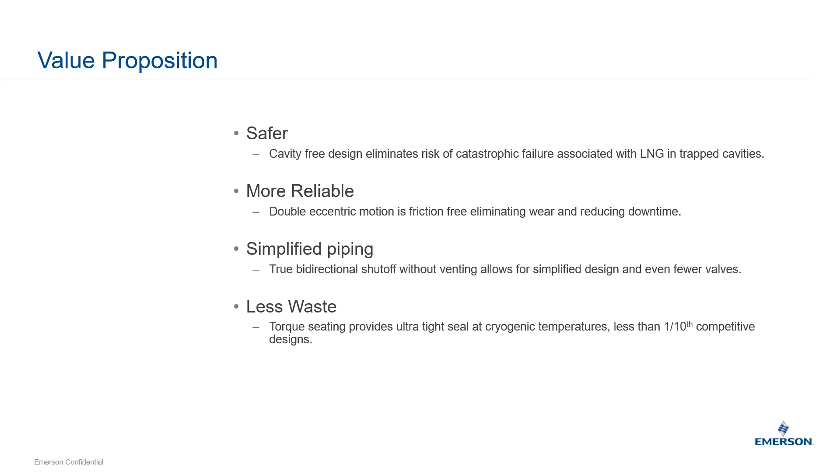We have a valve that seals tighter than anything else on the market. We also took into account today's emissions issues and standards, and tried to make the most efficient valve possible.

So a little bit about AEV. We're based out of Belgium. At the moment, all of our valves are manufactured in Belgium. We have a state-of-the-art manufacturing facility there that we built about 6-7 years ago. When we originally built that, just as we completed it, we were growing so fast we doubled it in size. And now we're doubling it again in size.

We purchased the property right next to us, and we're building a whole other building, kind of a mirror image of what we currently have, and it should actually be completed this summer. So it's kind of nice - we have a modern, clean, super efficient manufacturing facility. Not only do we consider ourselves technical leaders in design, but also in manufacturing and project execution.

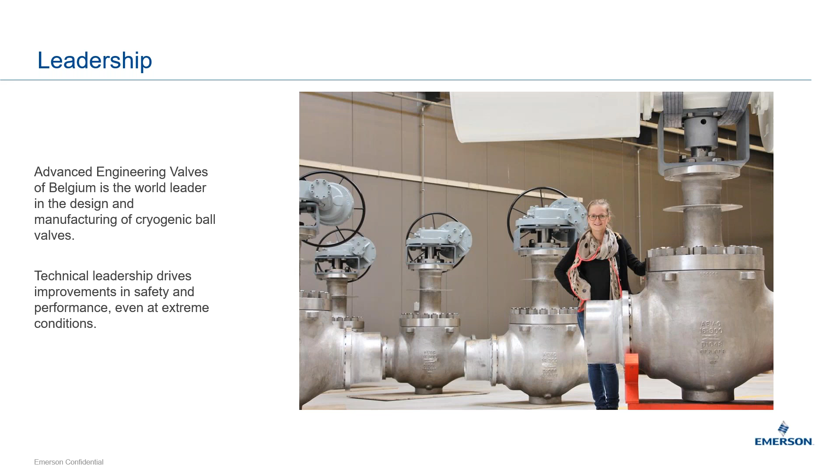And then this is what we make. It's all the same basic design - a top entry trunnion mounted ball valve. We make it 1/2 inch all the way up to 42 inch, class 150 all the way up to class 4500. We make it both in soft and metal seats. It's fire safe to ISO 10497, which encompasses API 607. It's certified low emission, and it's TUV certified for SIL 3.

Although our valve looks a little bit different, it's a ball valve and it's built to ball valve standards. It's built to ANSI B16.34, has an ANSI B16.10 face-to-face, and it's built to both API 608 and API 6D. And it's fire safe to API 607. So whatever your piping standard is, if it's designed to have ball valve isolation in it, our valve should drop in place without having to make any exceptions to use it. It should adhere to your spec and be good to go.

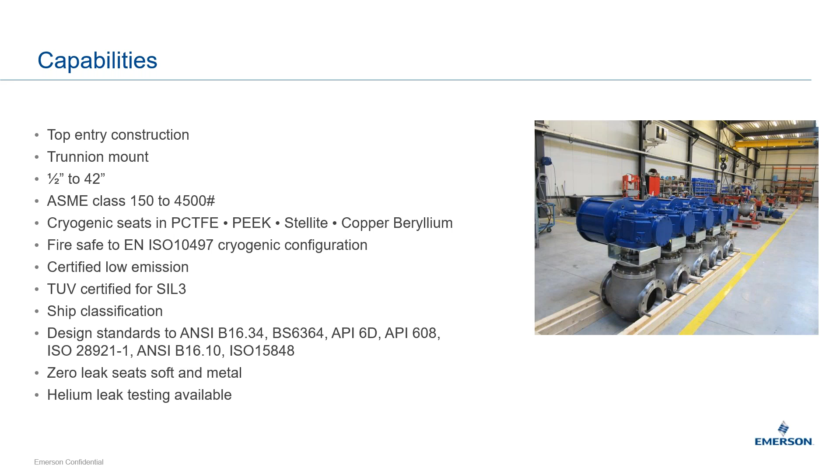Here's some of our ship classifications and experience in the marine industry. We've been very active in the floating LNG boom. We did both Golar ships through Black and Veatch. We recently did the Eni Coral FLNG ship through Technip in France. As we see bunkering become larger, we've been active there too, with the LNG bunkering barge going to Jacksonville, and we also do work on FSRUs through Excelerate and other places throughout the world. We've been active not only on the design side and processes here in the U.S., but also at shipyards in Korea and Singapore and other parts of the world, and with OEMs in Europe where these fueling systems for dual fuel engines are designed and manufactured and shipped out to shipyards and engine manufacturers like Wärtsilä and MAN.

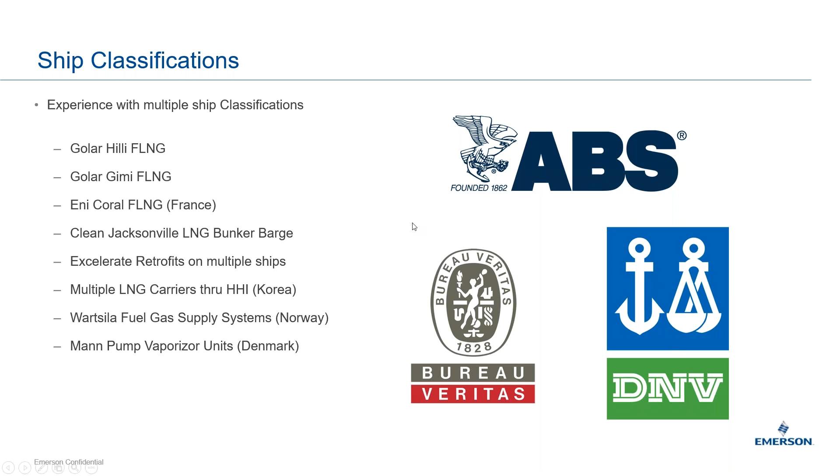So we have a lot of experience out there, and we've been able to gain this experience and this install base because we feel like we bring a lot of value, not only to the end user, but also on the engineering side, making it a lot easier. Here's some of the places our valves are installed, some of our customers. Black & Veatch has been very active in FLNG with their PRICO process, making LNG on large ships for Golar.

Excelerate is a large leaser of FSRUs around the world, and as they bring those boats in for scheduled maintenance and upgrades, they've been very active switching out some of their old valve technologies for AEV. QLNG, the LNG bunker barge, we did a lot on that through VT Halter for Harvey Gulf. Harvey Gulf also has an on-land bunkering system down in Port Fourchon that we provided all the cryogenic ball valves for. We've also been part of the Shell design verification test, and we've been very active outside of marine on all the large LNG liquefaction facilities being built in North America, as well as regasification projects in Asia and other parts of the world.

So coming back to the opening statement, we're fairly young compared to our competitors in the market, but in that short time span we've probably become number one or two worldwide in market share, and our install base is massively growing. We're probably number two installed worldwide for cryogenic ball valves already.

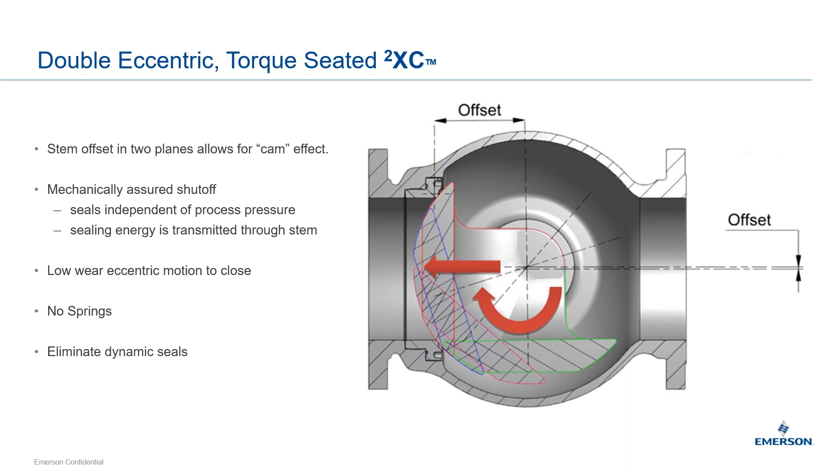And here's a neat video showing in reality how it works. If you look at this, you can see there's no rubbing between the ball and the seat, and you can see how the ball cams into the fixed seat and stops rotating.

And then when it opens back up, you can see the ball gets totally out of the flow path. There's no interrupted flow. We make this valve in a full bore and a standard reduced bore, so you get the same CVs as you do out of traditional ball valves. So there's a couple of neat things happening here.

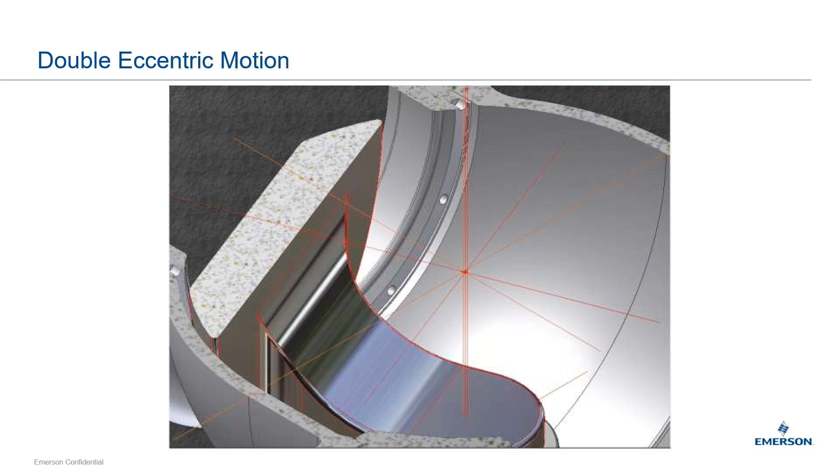When we put this together, what I was trying to show and pass along to people was the offset of the trunnions. So they have these two axes here: an orange axis and a red axis. The orange axis is the center line of the pipe and the valve. The red axis is the center line of the ball and the trunnion.

So if you look down at the bottom, let's see if I can get a little laser pointer action here. Here we go. So we look right down here, you can see how it's rotating off a point off center. And that creates this camming motion where the ball presses into the seat and creates a tight seal.

And so this operates on something actually called a logarithmic cam. What it does is it gives us a bit of a mechanical advantage, almost like a lever arm gives you a mechanical advantage, on torque applied to the stem versus the force the ball presses into the seat. There's this forward lateral motion, and this ball presses into the seat and creates a tight seal. All of that's based on where we put the offsets and how much of an offset there is to give us this mechanical advantage.

This was really difficult for us to figure out. This is a big part of our technology.

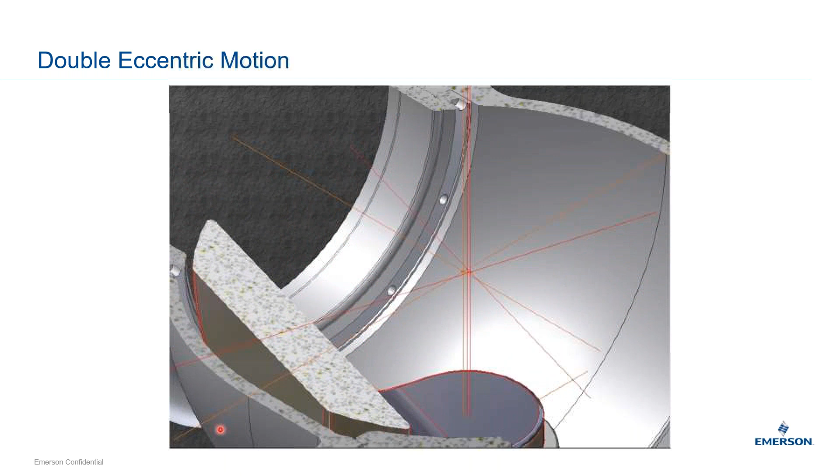There's a couple other neat things about this valve - the seat is not indexed, it's just a normal round seat. Technology like this has been around for quite a while in control valves. We see it in things called eccentric plug valves, segmented balls, V-balls. But the big difference between us and these other technologies is that we're designed for isolation. We're designed for tight shutoff, while those valves are designed for control.

All of those valves typically have a spring in the seat. A lot of them, their seats are also not round - they have to be placed just perfectly for the ball to come into them. Whereas us, we're designed for tight shutoff. We have a normal round seat, and what this does is it simplifies everything.

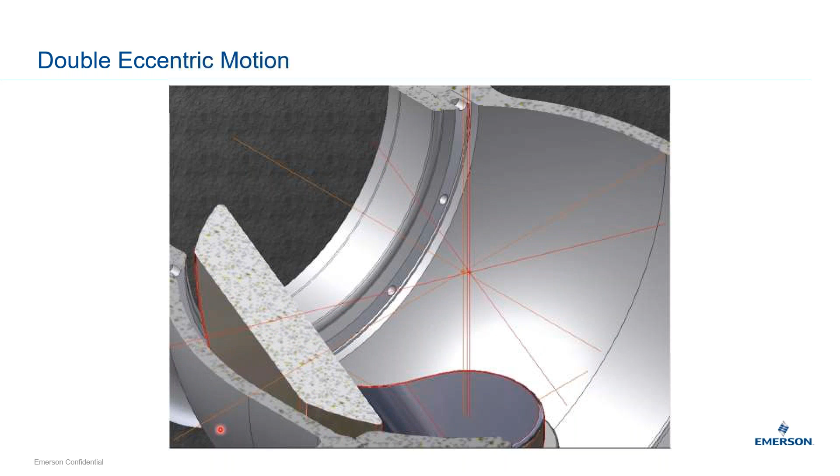We have a fixed seat that can be replaced in line. It gives you a repeatable tight shutoff, and then it seals totally independent of process pressure. So really, that's the big difference. We can get zero measurable leakage. It's built to ball valve standards, and it's designed for isolation.

So inversely, we're going to talk a little bit about how traditional ball valves work. And the reason I like to go over this is because I don't think that a lot of people have given traditional ball valves a lot of thought. They're very simple items that you turn 90 degrees and they turn things off - that's really the most thought most people give them. But in reality, they are simple items, but there's a little more to how they function.

And understanding how they function will really explain where their issues come in when you try to apply them to cryogenics. And talking about that opening statement, how there wasn't any new technology in this industry, I'm going to run through that a little bit here.

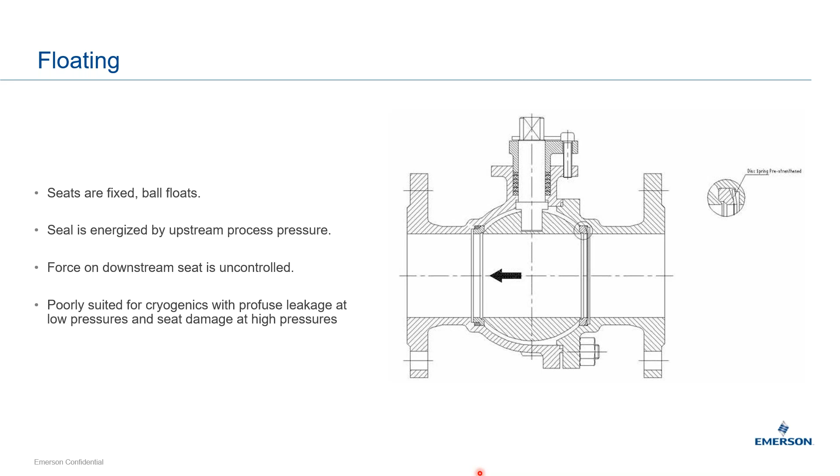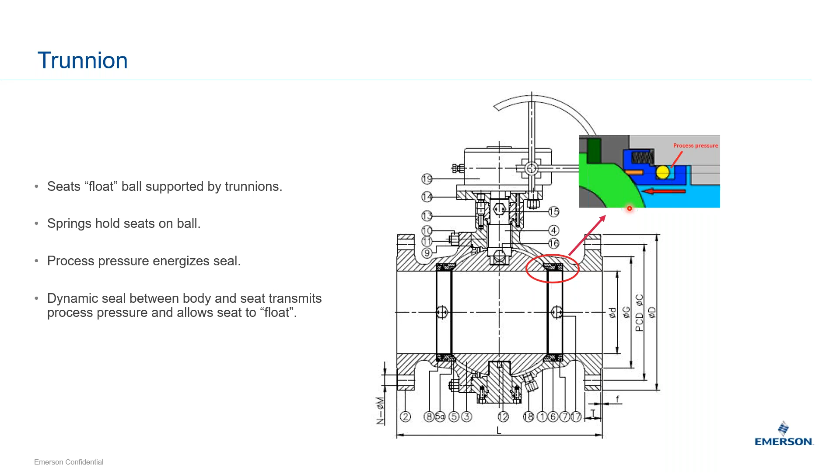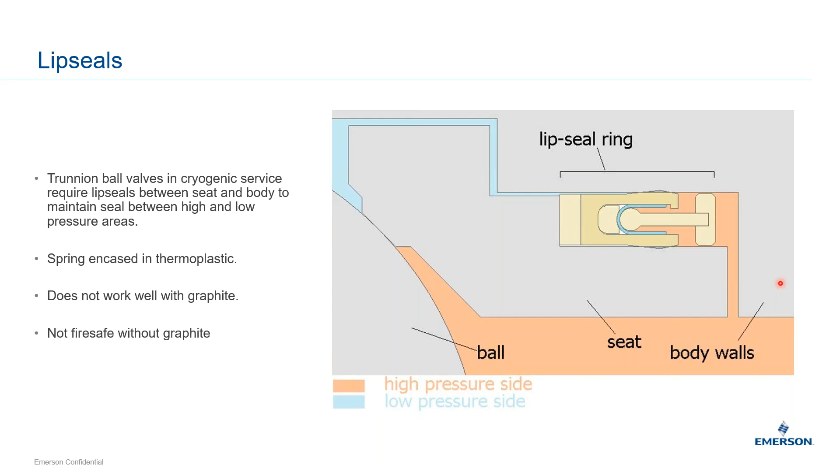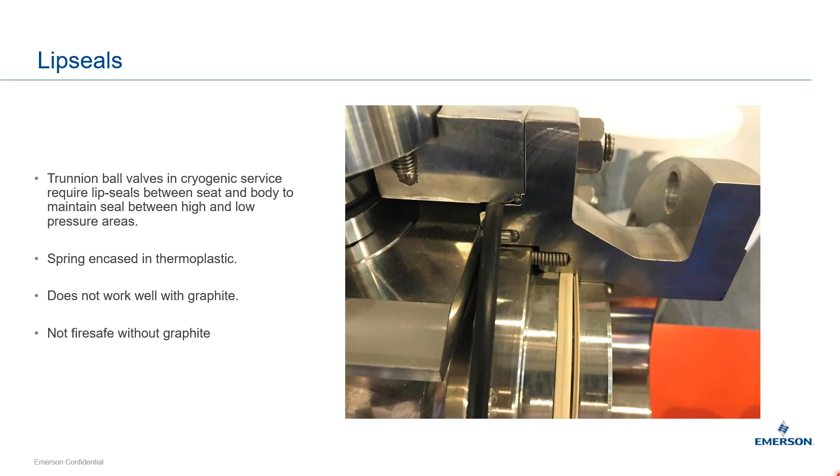And so if you look at this, you can see we have a lip seal here holding back all of the pressure for this valve, but also there's a lack of graphite. So I encourage everyone, if you're looking at cryogenic ball valves, trunnion ball valves, and using them for emergency shutdown or isolation, you need to question and look at their fire safe certificates versus what you're getting quoted on the bill of materials.

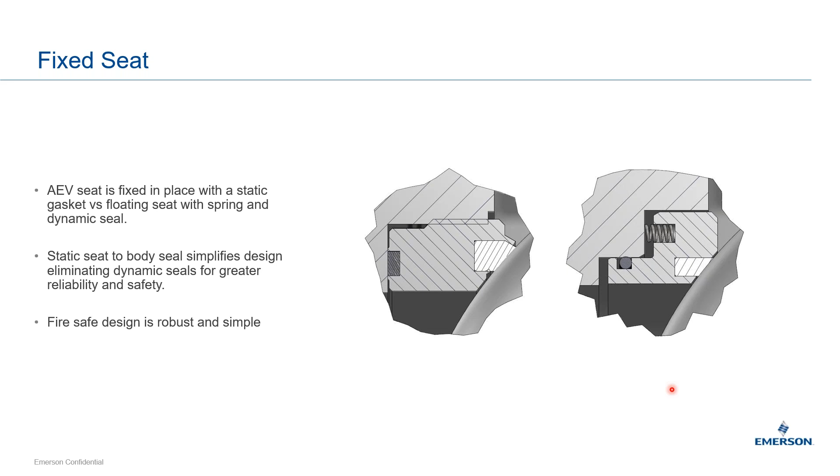So just to compare our valve versus traditional ball valves, we have a much simpler design, a lot fewer parts. We offer mechanically assured shutoff sealing, totally independent of process pressure, right? We're sealing the exact same at 1 psi pressure differential or 1,000. We're not going to leak through a thermal cycle, and we just have a much simpler, more robust, fire-safe design.

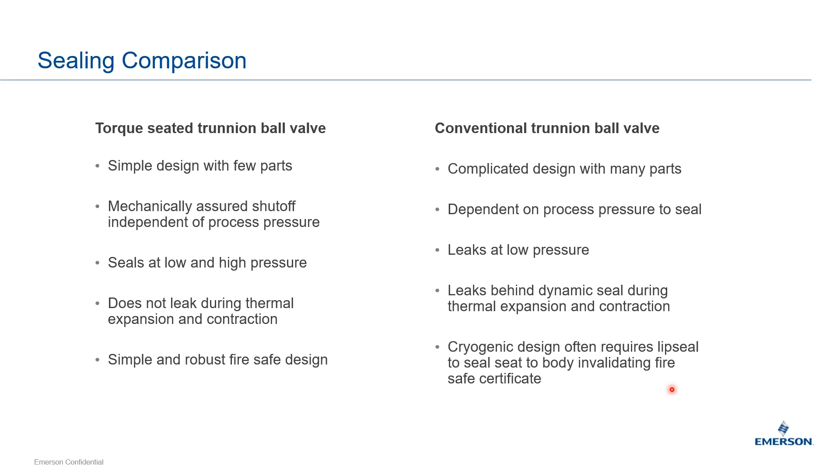So moving on from that, the other big deal when talking about cryogenic ball valves is the cavities inside the ball valves. They all have to be addressed, right? Because when you have a media that goes through a phase change, there's a huge amount of volume change when it either flashes from a liquid to a gas or goes from a gas to a liquid. What we're really worried about is going from a liquid to a gas.

LNG, for example, goes through a 600 times volume change. This means if it flashes from liquid to gas, it's going to expand 600 times. So with that, you can't have any trapped cavities. You have to be able to vent that to prevent a bomb from going off, basically.

There's two ways that traditional cryogenic ball valves have done that, usually either by drilling a hole in the body or creating some sort of a body vent. But the key here is that when you do that, it opens up a whole host of safety issues.

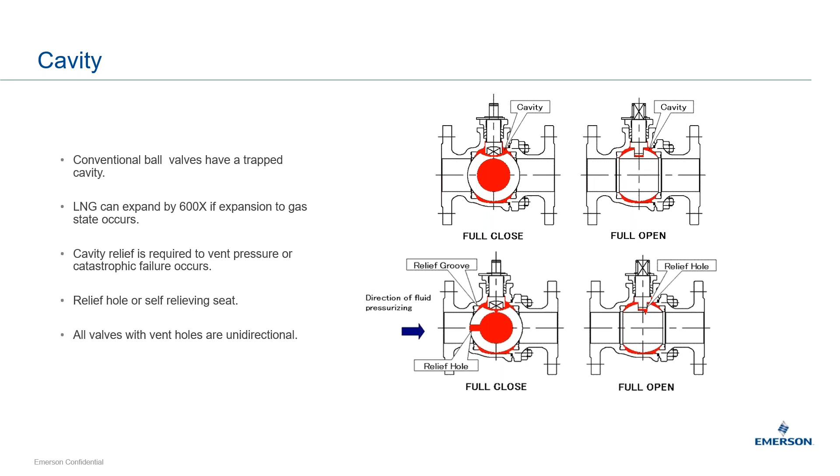The biggest one is that now this valve is unidirectional. So a lot of assumptions have to be made. After this valve is installed, you have to assume it's installed properly, since it's probably covered in insulation. You have to assume the operator understands how this valve is installed and which way it's sealing, and that it's not bidirectional. You also have to assume it's going to vent properly when it needs to vent. This is where having a bidirectional valve that's cavity-free like ours makes a huge difference.

When we get into some of these larger systems we've done, this has really been the savior for some of these construction crews. Because ultimately what we have is a valve that's cavity-free and bidirectional, and it's a top entry, unibody valve. The number one way we sell it is with butt weld ends.

So if you install this valve backwards and it gets covered with insulation and goes out into service, it's not a big deal. It's still going to seal tighter than our competitors will seal in their non-preferred direction. So really, we describe it as a bidirectional valve with a preferred direction. If you buy or install any of our valves, this is going to be the high pressure side behind the ball here.

Ultimately, we've done a lot of these large LNG projects where they're installing thousands and thousands of these valves. Usually when that happens, you bring in every welder you can find on site that's qualified, and you have all these contract welders out there, and they can be doing their best and thinking they're doing things correctly, but valves get installed backwards. It just happens. So to have a cryogenic ball valve that's been tested in both directions and verified bidirectional increases a whole host of safety.

If you're unable to go back and reverse that valve, you can leave it as is and just check the test reports to make sure it's bidirectional. The biggest thing it does on the engineering side is simplify the piping design. You don't have to worry about venting upstream or downstream, making sure the right valve goes in the right place in the plant, or that everybody's picking the right tag numbers and placing them correctly. This is a huge safety factor, and this is where a huge amount of value comes in, not only for the asset owner, but on the design and engineering side as well.

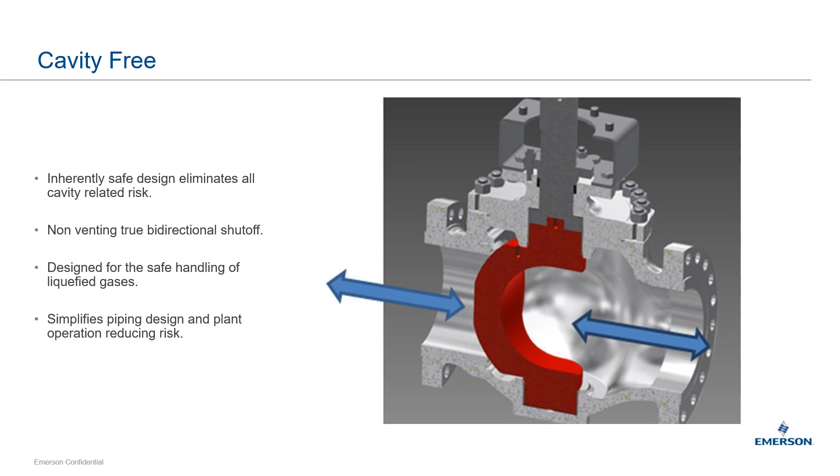The other big thing is low wear. I think we all saw this in that first original video. We don't make contact with our seat until the last few degrees of rotation. It's low friction. This minimizes a lot of the chances of particles getting stuck between the ball and the seat and cutting the seat. It really enhances the life of the valve when it comes to reliability and being able to shut off when called upon.

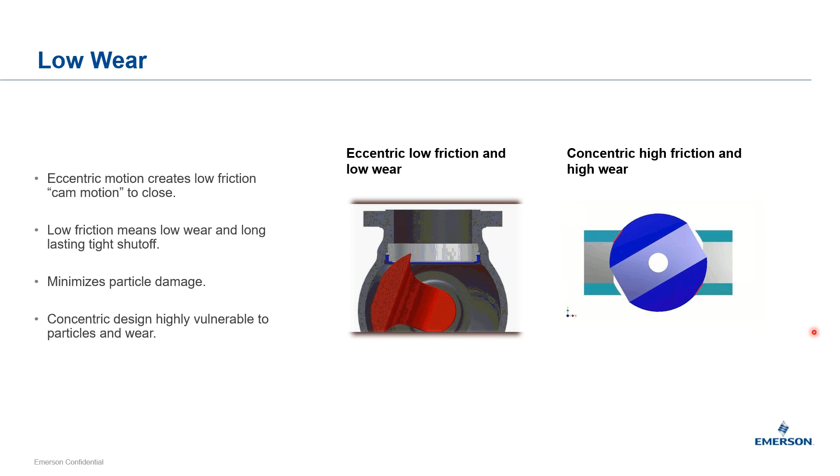This is what our soft seat looks like. It's a soft seat insert that's fully encapsulated in our seat assembly. We do things quite a bit different here - it's kind of neat actually. We'll take that soft seat insert during the manufacturing process and drop it in a bath of liquid nitrogen. It shrinks it, and then we set it into the seat assembly and let it expand.

After it's done expanding, we crimp it in. It's kind of hard to see here with these colors, but you crimp it in here and here, so it's totally encapsulated - it'll never come out of there. It's fully supported, and this allows us to use this exact design all the way up to class 2500, and you can open and close our valve with full pressure differential across it without damaging anything. It's very robust, very reliable, and very simple.

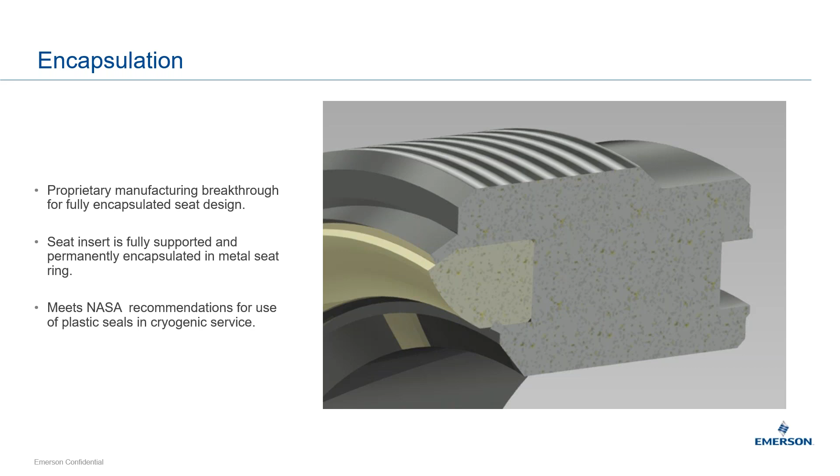Another nice thing about our valve is mass. As I mentioned earlier, our valve's top entry unibody design exists mainly to eliminate connectors, since connectors are leak paths or leak points. In big or small cryogenic systems, thermal expansion and contraction causes pipe stresses throughout the system, which usually results in a leak at a connector. Having a top entry unibody valve, eliminating any split body, helps with that, and making it butt weld makes it even better. Ultimately though, a top entry valve becomes a bit more mass and heavier because you have to add a top bonnet flange.

With our C-ball design, we were able to decrease the size of our top bonnet flange by 40%, which ultimately decreased the mass of our valve by 30%. When you start putting these things on boats, or in situations like an LNG loading arm, this becomes a really nice feature—you save a lot of mass, it adds a lot of value, and you still get to keep that unibody design.

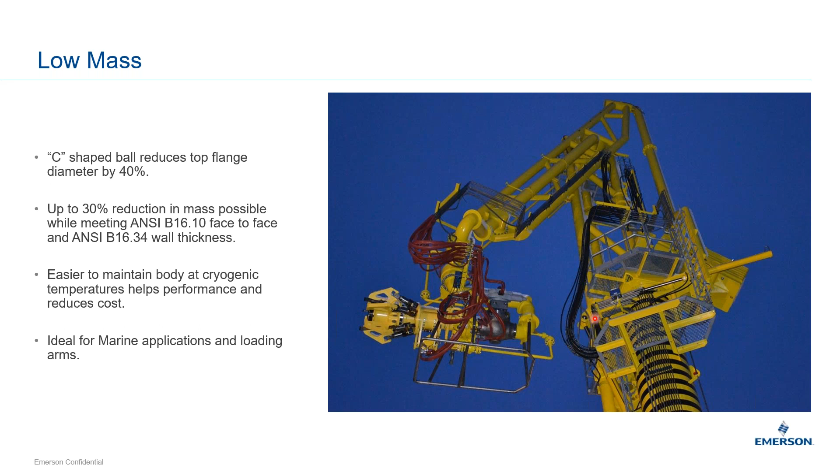Testing is also a fun thing to talk about, and I mentioned it briefly earlier regarding thermal expansion and contraction in traditional trunnion ball valve seats. Here's what a cryogenic ball valve test looks like: you take your valve and drop it in a bath of liquid nitrogen, bring it down to cryogenic temperatures, then do a low pressure and a high pressure test using helium, with an allowable leakage rate. Helium is very difficult to seal because it's a very small molecule, and the valve is at cryogenic temperatures, so it's a very difficult test to pass.

But ultimately, at AEV, we've decided this test is inherently flawed, and flawed in favor of the valve manufacturers. What's happening is you're getting the valve perfectly uniformly cold, as cold as possible, shrinking the body and the seals and seats to the ball from the outside in. In reality, when installed and used in the real world, the cryogenic media goes through the valve, shrinking it from the inside out, pulling the ball and the seals and seats away from the body. So a lot of manufacturers struggle to pass this test but will pass this bench test and then never seal tight in the field.

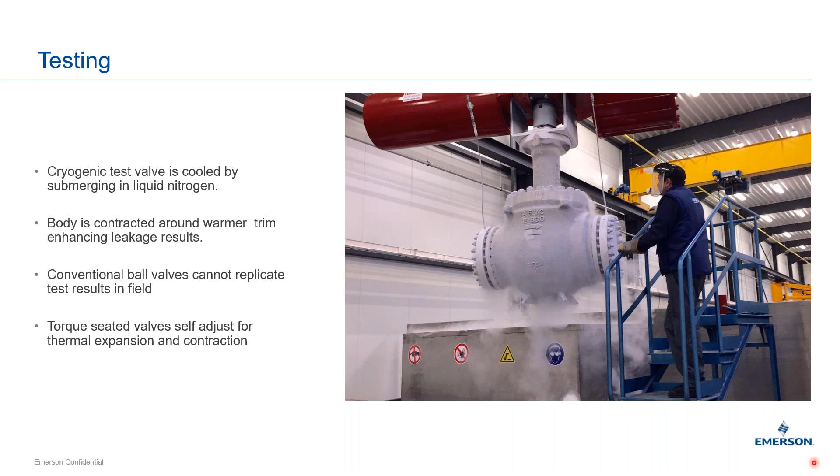So here's how the test works: you do your low pressure, high pressure test with helium at cryogenic temperatures, and the allowable leakage rate is pretty significant—150 cc's of helium per inch of valve per minute. So during your pressure test, you're allowed to leak. For example, on a 4-inch valve, you're allowed to leak 600 cc's of helium a minute and still call it a tight shutoff.

In reality, AEV tests to 10 times the standard. We test to 15 cc's of helium per inch of valve per minute, and we usually get way better than that. We get close to zero measurable leakage, a lot of times zero measurable leakage. And this is very repeatable in the field as well.

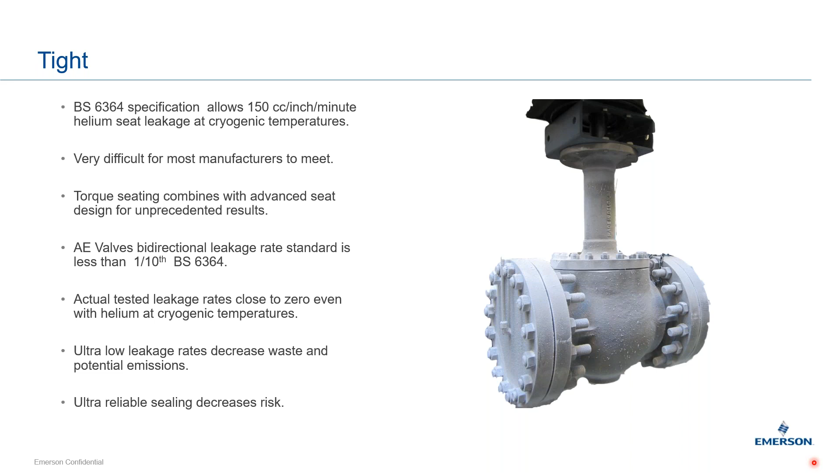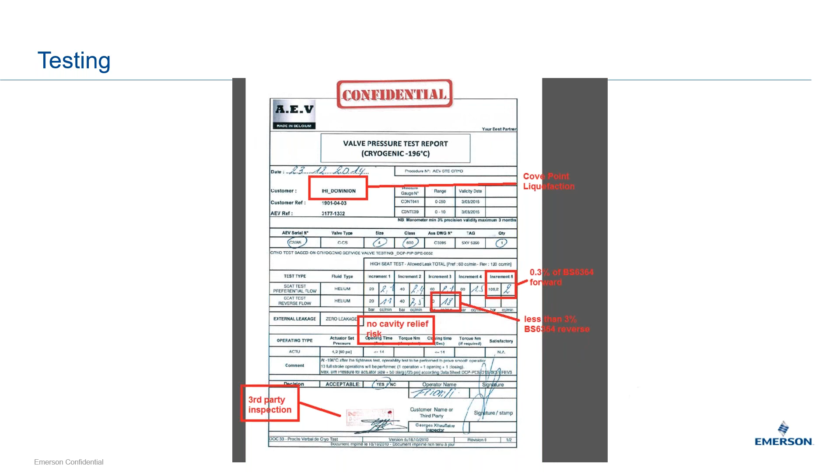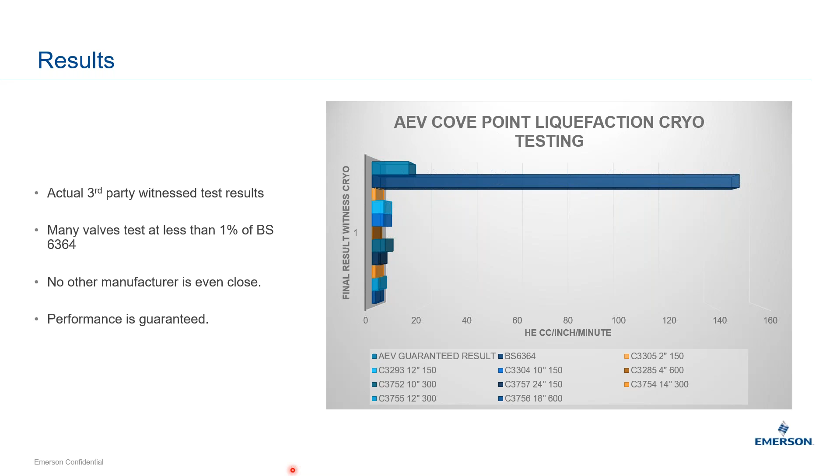So getting back to that safety value proposition, right, the things we've done so far to really ensure we have the safest cryogenic valve out there. We've done everything we can to minimize seat leakage by not relying on process pressure to seal, with low wear trim. We've minimized body and connection leakage by having a unibody, top-entry valve that's welded in place. And then we make sure we have a reliable valve that's going to operate on demand without any trapped cavity, that is bidirectional, and really going to reduce any catastrophic failure due to venting, installation error, or operation error.

So some of the best practices, right: we offer mechanically assured shutoff, bidirectional, no cavities, low wear, low emission, robust, fire-safe design and certification, and a unibody design.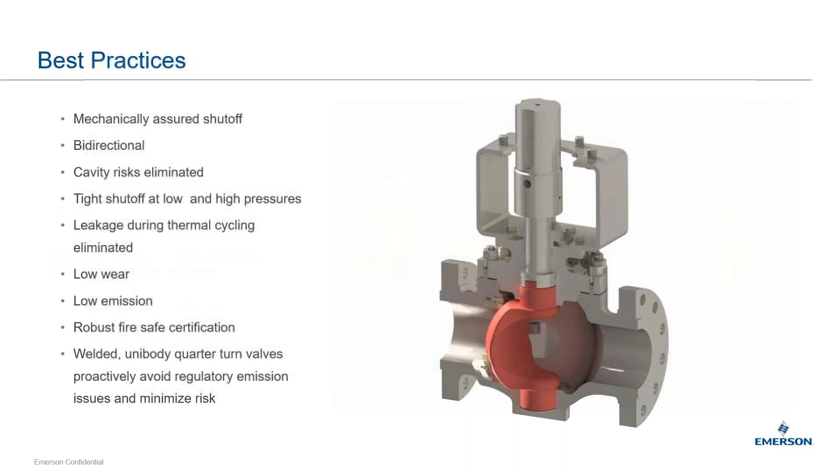One thing we haven't touched on yet, along with that picture I showed you before describing how we have 30% less mass because of our smaller top bonnet flange—another thing that really reduces mass and brings a lot of value is our butt weld valve design. We welded it in place without pipe pups and without having to disassemble the valve. So with our valves, you can weld it in place without pipe pups, which means we save a lot of space and weight on top of the original valve design, and you also save a lot of time and effort.

Let's say you didn't have room for pipe pups—our competition has to disassemble their valve, remove the seat, weld it in place, put it back together, and then get going. This adds a lot of time and cost to startup and construction, but also introduces the variable of whether that valve was put back together correctly. This valve was already tested as it was, and now it's been taken apart and reassembled in the field—you never really get back to those perfect conditions you had in the manufacturing facility. So this is a really big cost saver, and it's been a really big selling feature for us.

You don't have to buy the pups or anything else. It's a really nice feature. And if you have any questions about that, just let us know. We have thousands of these installed in the field without issue.

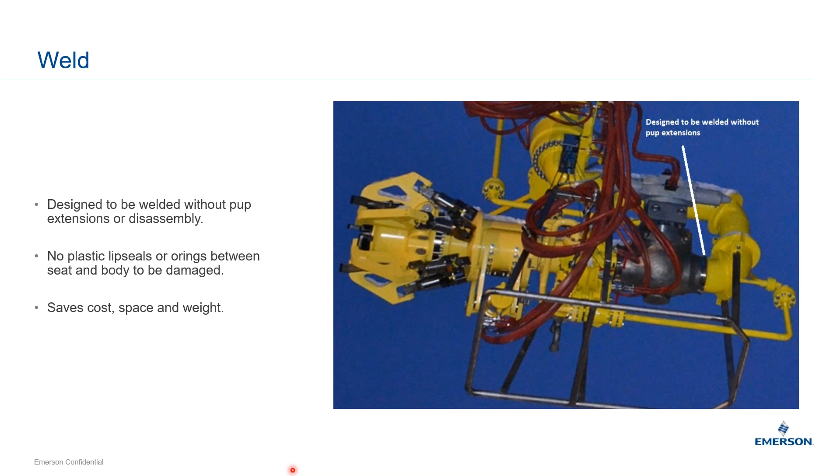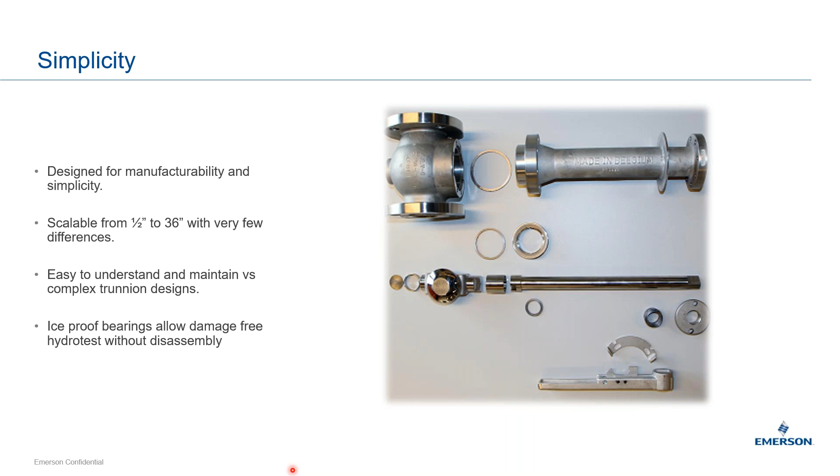Just a quick slide showing how simple the valve is. It's like 13, 14 pieces in the entire valve. If you guys have ever seen any other trunnion ball valves disassembled, or just an exploded drawing of one, you can see the hundreds of parts and pieces that go into it. We were really focused on keeping it as simple as possible and eliminating any points of failure when we designed this valve. Kind of a Murphy's Law situation.

For SIL 3 certificate, we get involved a lot in emergency shutdown situations and also with HIPPS and some other things. It's very high numbers. We've had a couple situations where we've been able to eliminate partial stroke, where our competitors have had to use partial stroke, and this becomes a very costly endeavor for the asset owners. They have to not only buy a more complicated shutdown valve with all the controls attached to it, but there's a lot of cost associated just with the PM associated with stroking that valve, recording it, and keeping up with it.

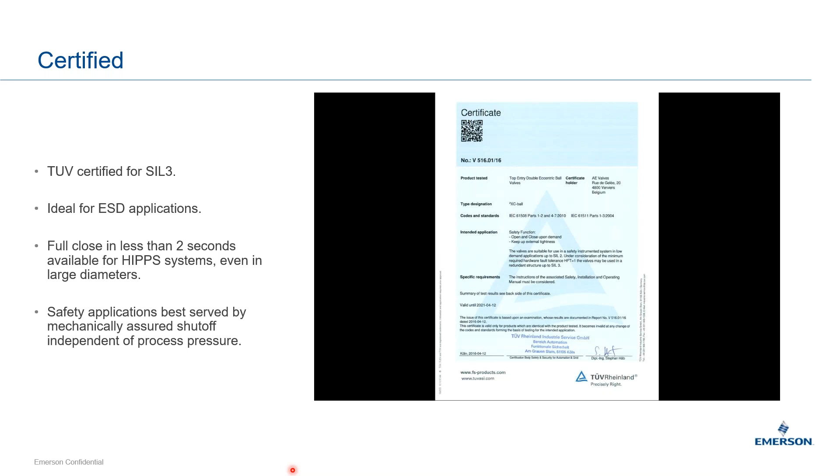Here's some of our references, some places we've provided the HIPPS valves. If you're not familiar with HIPPS, I believe it stands for High Integrity Pressure Protection System. We see a lot of this in the marine market. We don't always have a big multi-stage flare system or space available for that if you have an overpressurized situation. So instead, people use a HIPPS system where they'll put two of these valves in series, along with maybe three pressure transducers in series. If pressure rises to a certain point, these valves have to close in less than 2 seconds and cut off the pressure supply to the rest of the system. Typically it's been done with axial valves, which don't have as much capacity as a full bore ball valve. It can get very expensive, and because of our low wear between the ball and the seat without any sticking, we're really able to do that.

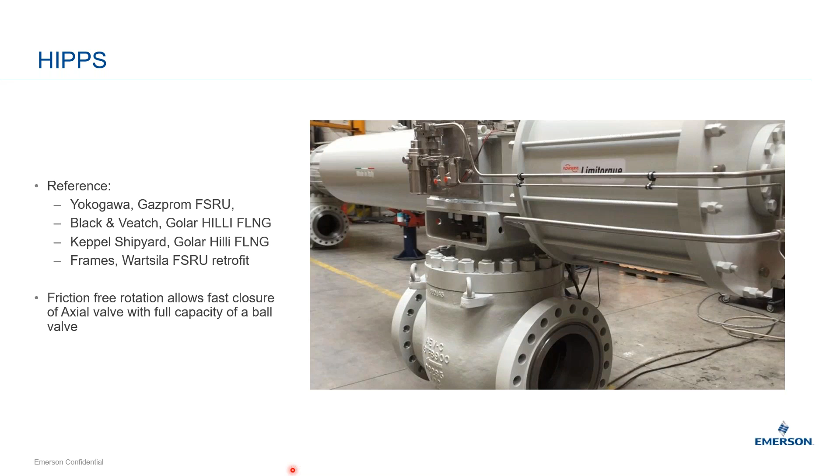Just a quick rundown here on our valve versus traditional ball valves. We're cavity free, where no one else is. We offer bi-directional shutoff, where no one else does that. We test to 10 times industry standard in our cryogenic tests. We don't rely on any springs or process pressure to help us seal. There's no dynamic seals in our valve, just big static gaskets. We're torque seated, low wear, fully encapsulated seat. We're not going to leak through a thermal cycle. And the big one is we have a very low risk of catastrophic failure compared to anybody else. Just a much, much safer, more reliable design.

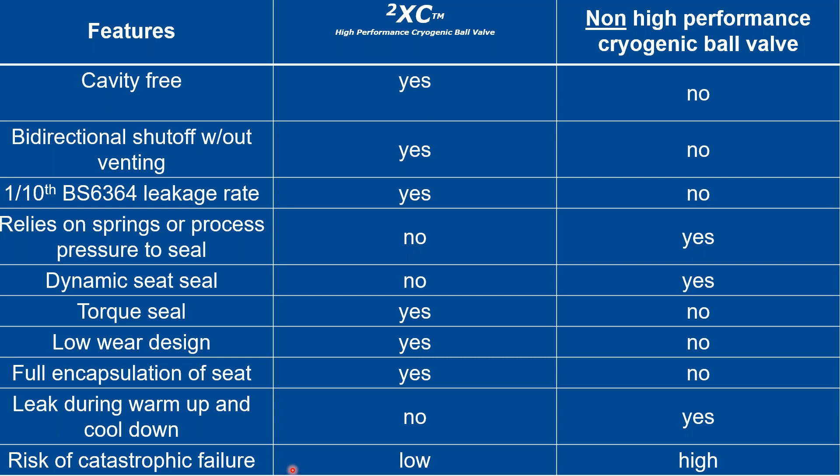So that's our base product in a nutshell. I've got a couple other neat products I'd like to show you guys. And really these are born out of the fact that we have an entire engineering department that is very capable and very knowledgeable, and all of those engineers have been with us since day one.

So one thing I find about other ball valve manufacturers is that they've been around so long, and a lot of them have changed hands many, many times. With that, they've lost a lot of their own tribal knowledge on their own product. For us, the guys that designed valve number one and helped design it from the ground up are still with us. We did go through multiple revisions and small changes, improving our product as we go along. So we have an immense amount of intimate knowledge and tribal knowledge on our own product, where I think a lot of others struggle with this.

But also what that means is if you guys have a difficult application or something you would like us to take a look at, we have the ability to do that for you. And we've done that for a couple other customers, and this is where these next two products came from.

The first is a double isolation and bleed valve. What this is, is a ball valve with two bidirectional seats and a bleed port in between, inside a single ANSI B16.10 face-to-face valve. So what this means is if you have a situation where you need verified shutoff...

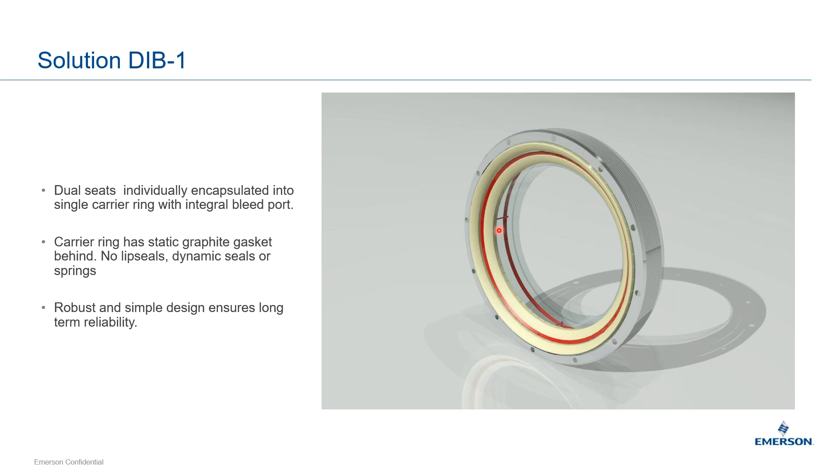I think you can, I'm hoping these drawings here paint a pretty clear picture, right? We have these two bidirectional seats. This is the bleed, or the port, or the cavity in between, that gets bled out at a common outlet here.

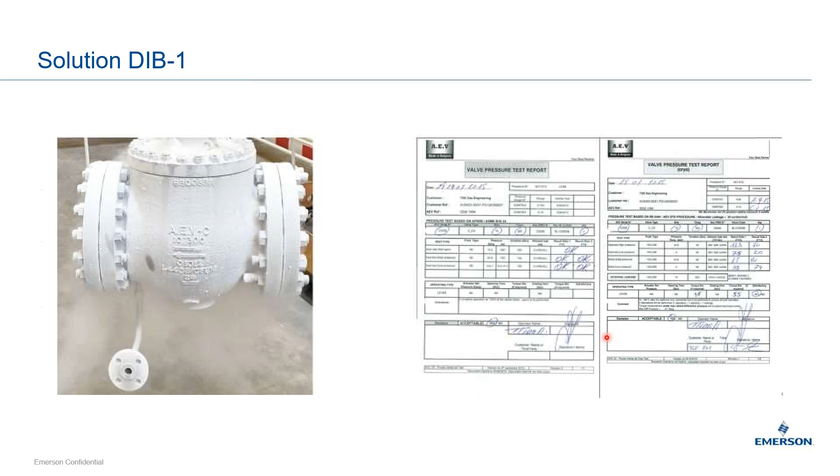All right, we'll move on to the next one. And this has been a pretty popular item on loading and unloading docks, places where you're going to have bidirectional flow, but at the time during the process you don't want bidirectional flow.

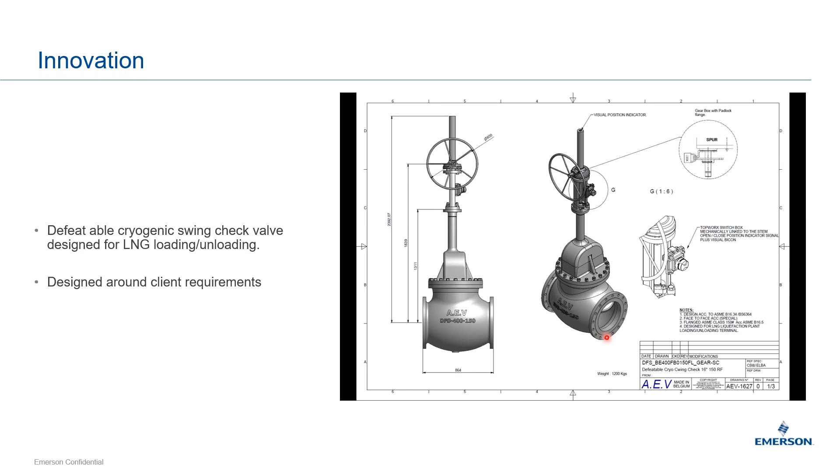So what we have here is a defeatable check valve. What we mean by that is you have a check valve, like a swing check, that works normally as used, but if you want to, you can pull the swing check out of the flow path and then have reverse flow. Here's a little bit better drawing of it.

So you can see here it's kind of like a gate valve body, but with a swing check down here. And so if you want, you have flow this direction, preventing reverse flow.

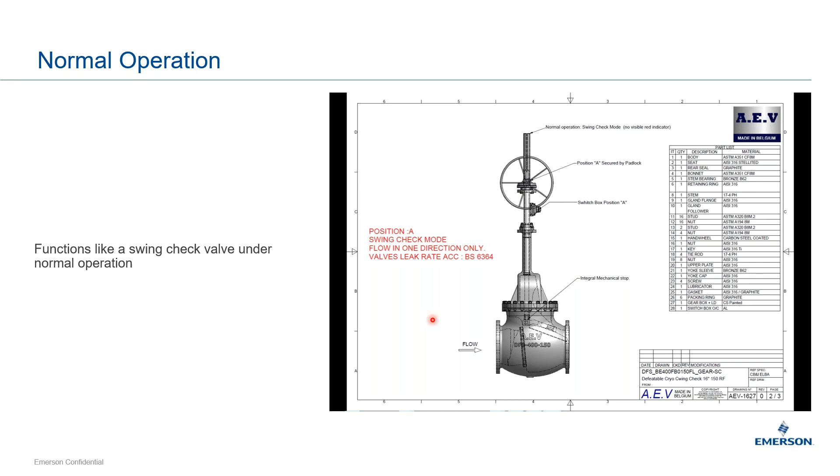Let's say this is a loading and unloading dock. One day you're loading the vessel, the next day you need to unload. What you can do is put two of these valves in series, opposite directions of each other. Open one, close the other, and now you have a single pipe run out to where the loading and unloading happens, saving a whole lot of money. You're able to maintain the flow direction you need for the process that day without major changes. It's pretty simple, but it brings a lot of value, reduces costs when designing a system, and it's very reliable.

Here you can see the check pulled out of the flow stream. So, in the flow stream, out of the flow stream.

We have a full engineering department here to bring solutions. We consider ourselves technical experts, not only in manufacturing but also in the design of these valves. So if you have difficult applications or a difficult solution you're looking for, please bring it to us. We'll be happy to look into it.

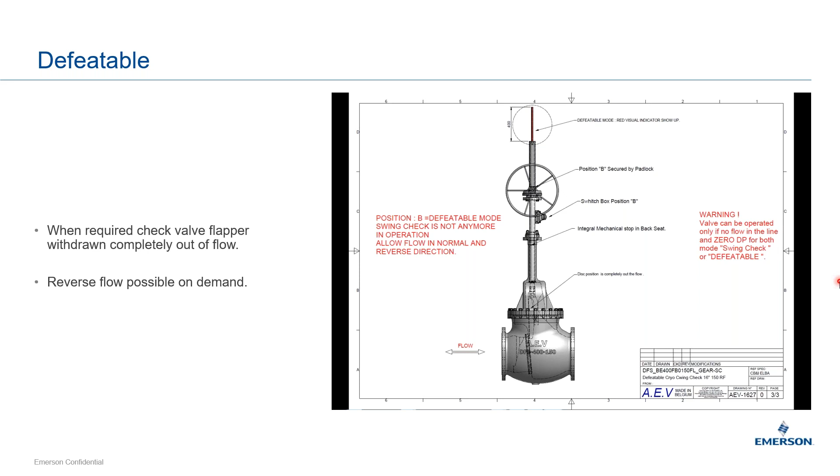A couple other things as we wrap up. Quality is a big issue for us, we focus a lot on it. One thing we do differently is we don't hydro test our valves. We do shell and seat tests with dry nitrogen, then drop the valve in a bath of water and look for bubbles. It's a much more reliable way of doing it. You can do a hydro test perfectly, and sometimes it's just not enough time to find a problem like a pinhole in a casting. This is a much more reliable way to do it.

It's a little bit dangerous, which is why most people don't do it. In our factory we've built big cement bunkers, and there's a big hydraulic cage that comes over during the test to keep everybody safe. Then we watch it with cameras and mirrors.

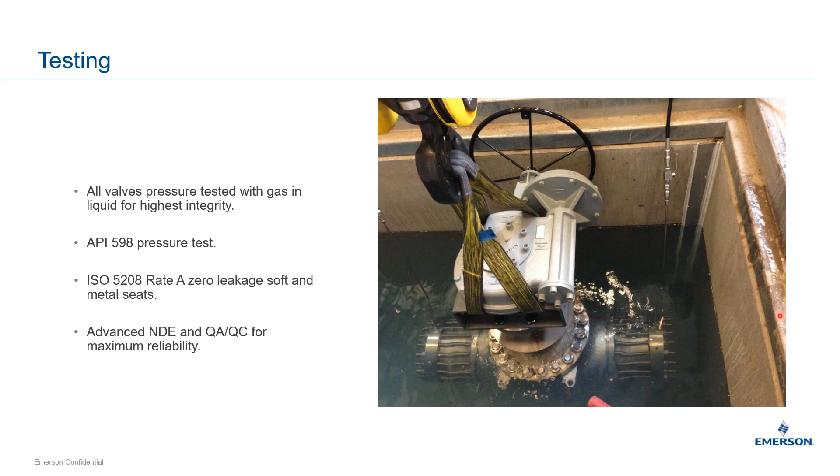Another couple of things we do: dye penetrant tests on every single casting, X-rays on every single batch of castings, and everything is built to order. That's one thing when it comes to dealing with ship classification companies, it's very simple for us. We have a lot of experience with them, and since we're building to order anyway, it's easy to track the order, have them come to the foundry and factory to do their audit, and get through it seamlessly.

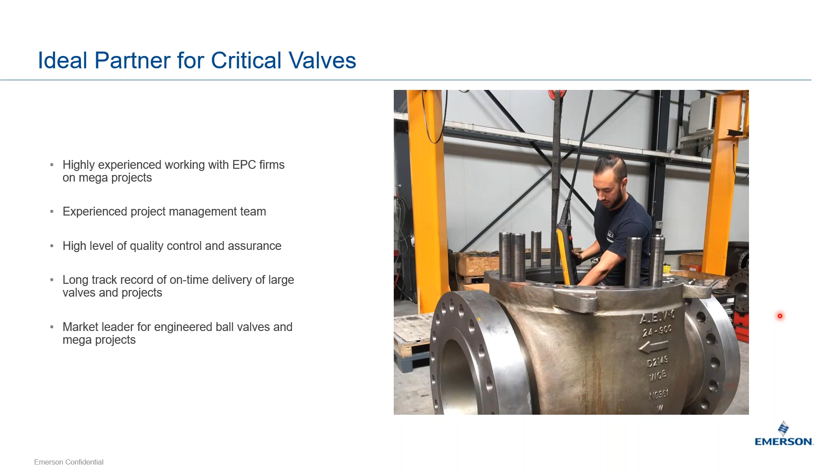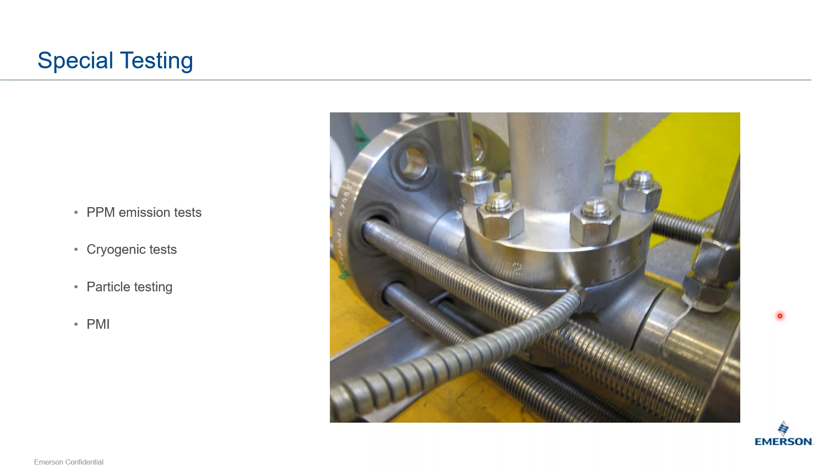We feel like we're ideal partners for these kinds of applications. We know it's difficult for a lot of people to find good engineered solutions for cryogenic valves. We do all cryogenic testing on site. We can do fugitive emission tests, particle tests, anything like that.